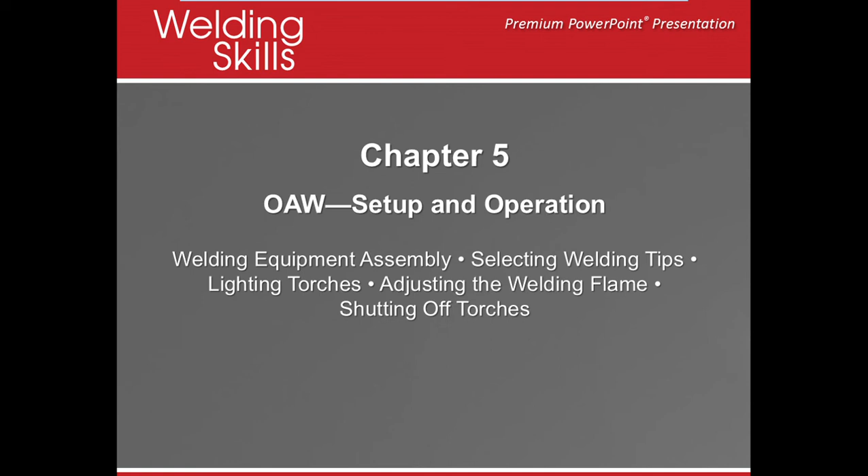Alright, so we're going to talk about putting on the regulator and the hoses. So the first thing we want to do is we want to crack the cylinder valve. We're going to open and close it really quickly. This allows us to blow out any type of debris or material that's stuck in there.

Then we're going to put our regulator on. We're going to make sure that there's nothing that's going to get in the way of us putting this on correctly. We want to make sure that we don't cross thread because we know this regulator is brass, and so are the fittings on our cylinder valve. Okay. We want to also make sure that the adjusting screw is backed all the way out before we put any type of pressure on it.

Okay. Then we're going to do the same thing with the acetylene regulator, and then we're going to purge all the hoses, okay? Then we're going to attach it, the red for our fuel, that's acetylene, and the green is our oxygen, okay? And then we're going to slowly open our valves.

When we open an oxygen valve, we're going to open it until it doesn't go anymore because it is a seating valve, which means there's two O-rings in there from the top and the bottom, and they need to seat fully for it not to leak. Now the acetylene is a little bit different. The most we want to go is 3/4 of a turn, and it will stay and not leak at whatever area that you keep it at. So we want to make sure that we can turn it off quickly.

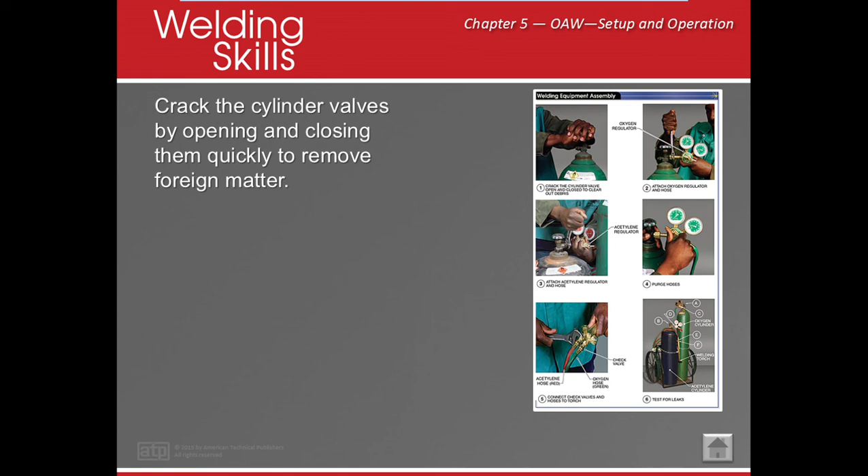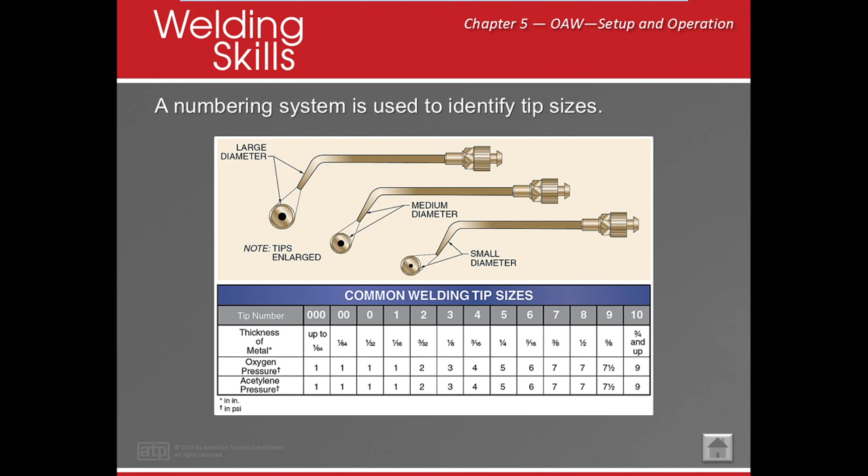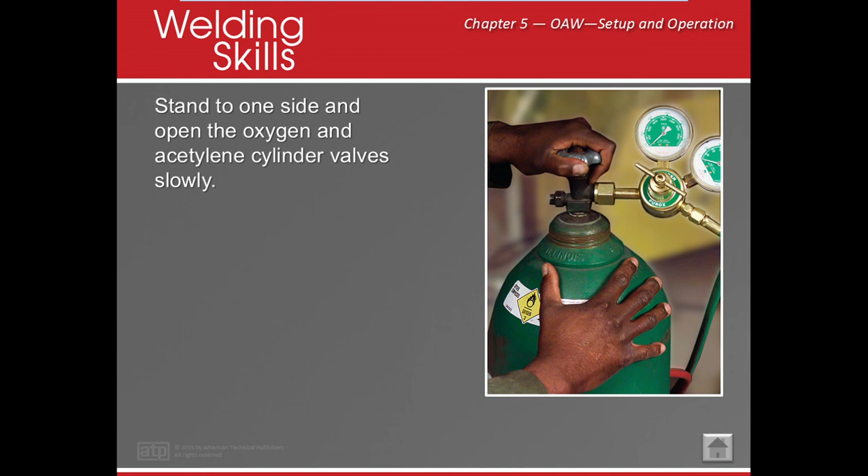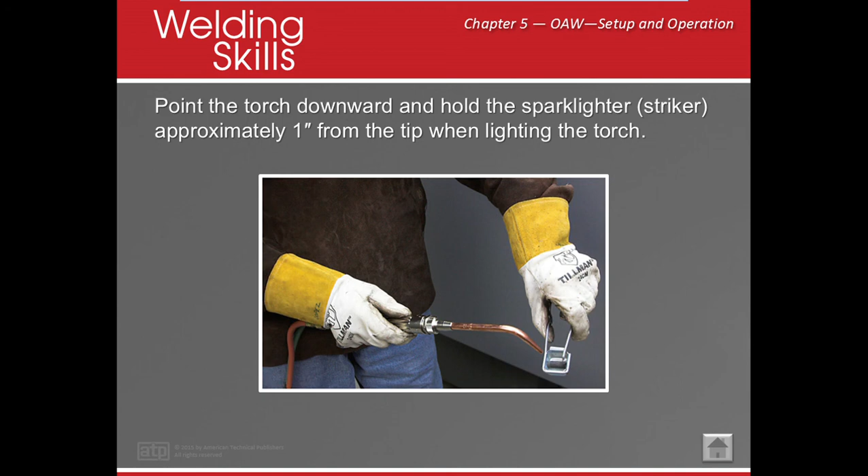All right, we always want to point the torch down and use a striker. Why wouldn't I want to use a match or a lighter? Well, of course, they can always catch yourself on fire, and that little lighter can always blow up in your hand. We always want to point it downwards so that we don't light anybody, especially ourselves, on fire.

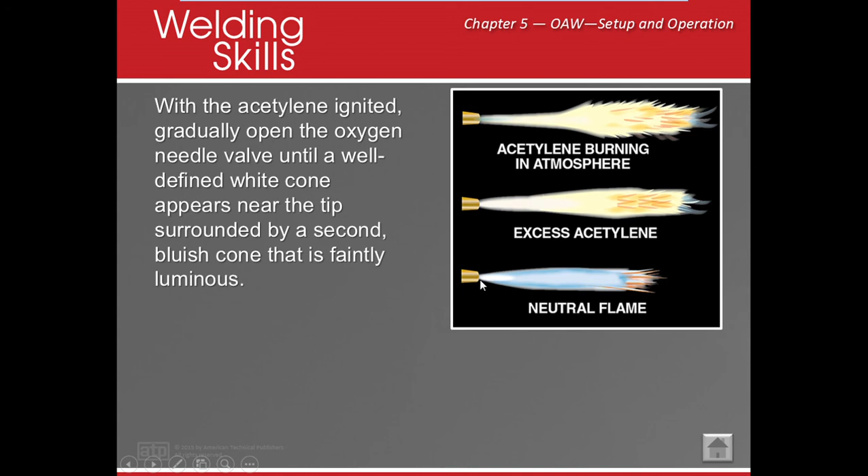Then we're going to open up the oxygen, okay? And they say that we need a well-defined white cone near the tip. So what they're saying is this area here, right here, is going to be well-defined, okay? So we're going to be able to make a neutral flame.

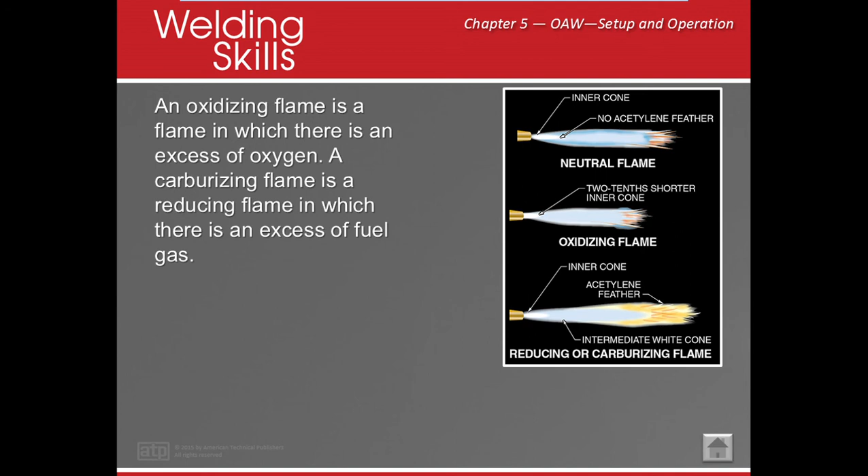A carburizing or a reducing flame means we have an excess of fuel gas. That can be acetylene, that can be MAPP gas, that can be natural gas, whatever we're using, okay? And it's going to be a lot oranger, and it's going to be a lot longer. We're really not going to be able to see too much of the cone, but it will be there.

All right, points to remember. We want to make sure we properly secure cylinders because we don't want a bomb going off or even a rocket. We want to point the valve outlet nozzle away before we crack the cylinder because we don't want any oxygen or acetylene on ourselves, which can cause fire.

We want to make sure that we test connections whenever there's a connection, whether it's at a tip or at a hose where the gas comes in or out. We want to use soapy water and check for bubbles. Okay. Now the welding tip size we know is the number is determined by the hole, but whatever hole or tip size that we use is determined by material thickness.

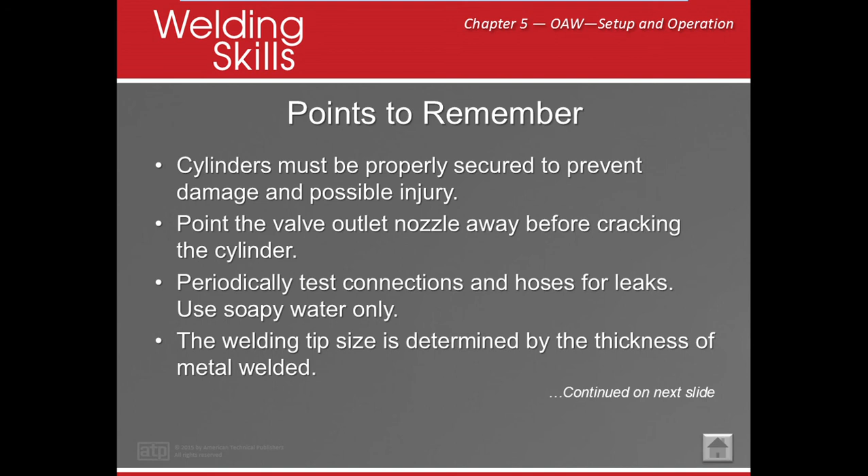So we need to remember 3 different rules. Rule number 1, match our base metal to our filler metal. Rule number 2, we want it as strong or stronger than our base material. And rule number 3 says 90% of what I do is dictated upon thickness of material. So we know that the thickness of material dictates the size of welding tip that I'm going to use.

All right, we always want to stand to one side before opening the cylinder valve because if it blows out, I do not want a face full of gauge. We want to adjust the torch to a soft, neutral flame, that's a 1-to-1 flame, unless the type of metal requires a different type of flame.

Prevent conditions that may cause a backfire or flashback. Ultimately, when we get a flashback or a backfire, it's because we have a dirty nozzle or we're depriving it of fuel, oxygen, or combustion. Okay? We want to make the passage in the welding tip clean, so we always need to make sure that we clean it. And when we clean it, we want to make sure that we leave the oxygen on so that it can blow out any soot.

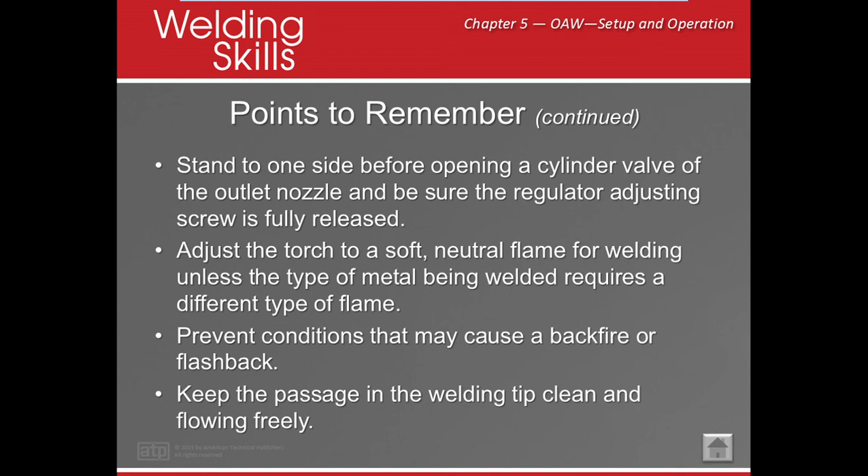All right, why should cylinders be secured before being used? Well, we want to make sure that they don't get damaged and fall over and somebody can possibly get hurt. Why should the cylinder outlet nozzles be examined closely? Well, we want to make sure that there's not a damaged screw thread or anything like that. And if we have a poor connection, we're also going to lose gas, which means we're losing money.

What is the proper order for setting up the welding equipment? All right, guys, here it is. Number 1, crack the cylinder valve by opening and closing them quickly to remove foreign matter. Number 2, connect oxygen regulator and hoses. Number 3, connect the acetylene regulator and hoses. 4, purge hoses. 5, connect check valves and hoses to torch. 6, test for leaks. All right.

Why are check valves used? Well, check valves only allow the flow of gas in one direction, which means that flow of gas, if it ever combusts, doesn't go back into our hoses and doesn't go back into our cylinders, which can cause explosions. What is the proper method of testing for gas leaks?

All right, guys, what do we do? Light a match. No, just kidding. Here's one way they say to test for leaks: open the oxygen and acetylene cylinder valves. And with the needle valves on the torch closed, adjust the regulators to approximate working pressure.

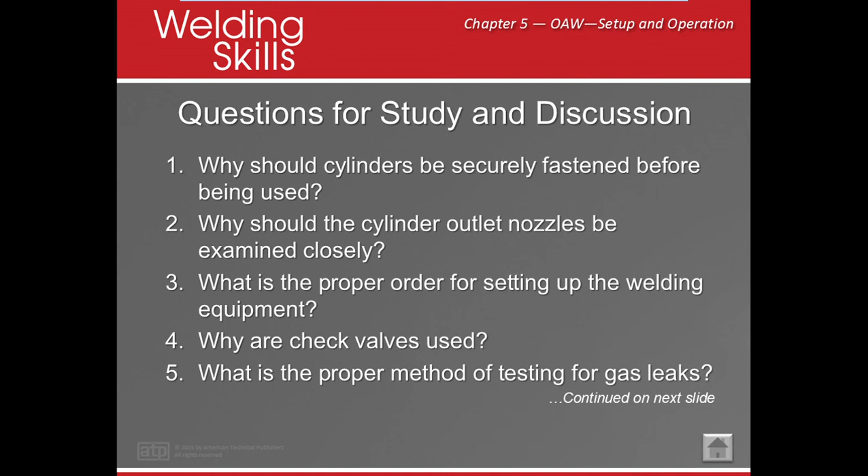All right, what governs the size of the welding tip that should be used? Drum roll, guys. What? Thickness of material. Describe the process for lighting and adjusting the flame for a torch. It's not going to be for a cutting torch, it's going to be for a welding torch. There's a typo on here.

All right, number 1. Select the correct welding tip size for the metal to be welded and connect it to the torch, which means making sure the thickness of our material is comparable to the tip size that we're using. Stand to one side and open the oxygen and acetylene cylinder valve slowly. Set the working pressure of oxygen and acetylene regulators, adjusting valves to correspond to the required working pressure of the welding tip. Turn the acetylene needle valve on the torch approximately 1/2 turn.

With the spark lighter in the hand held about 1 inch away from the end of the welding tip, ignite the acetylene as it leaves the tip. Adjust the acetylene until the smoke disappears. The acetylene needle valve on the torch should be turned approximately 1/2 turn. Well, that was about it. Okay. All right. How far should the acetylene needle valve be opened when lighting the torch? About a 1/2 turn. All right.

What is an oxidizing flame? An oxidizing flame has an excess of oxygen. What is a carburizing flame? Well, it's also called a reducing flame, and there's an excess of fuel gas. What's the difference between a neutral flame and a carburizing flame? A neutral flame has neither oxidizing nor carburizing characteristics. The brilliant white cone should be approximately 1/16 to 3/4 inch, depending on the welding tip size.

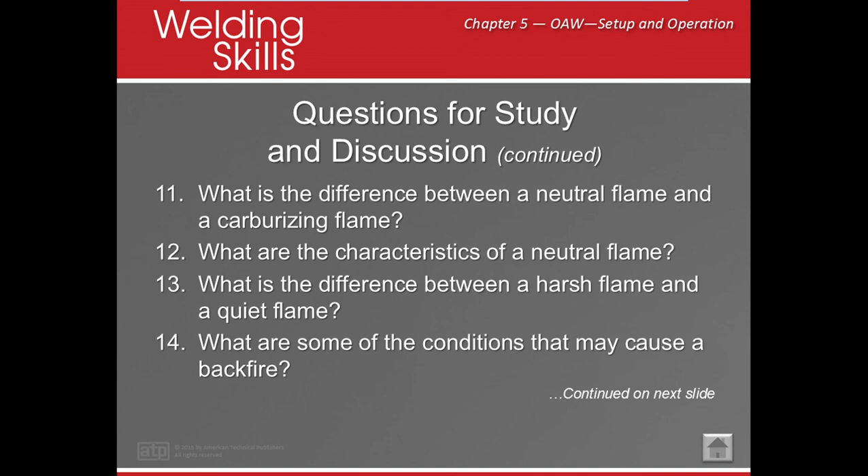What causes a backfire? A backfire can be caused by operating the torch at a lower pressure than required for the tip, touching the welding tip against the work, overheating the tip, or an obstruction in the welding tip. All of those things can cause problems.

All right, what is meant by flashback when we're using an oxyacetylene torch? A flashback is the recession or the movement of it into the mixing chamber of the torch itself. And you'll hear, okay? A flashback flashes quickly into the torch and it burns inside. It gives that hissing and squealing sound, and it's because a welding tip can be clogged, the needle valves are not right, or the pressures are incorrect.

Okay. Why are hoses purged after being connected to the regulators? Well, we want to make sure that if there's any dirt or anything lodged in there, it comes out before we attach them to the torch. Okay. Why should the welder stand to one side when opening cylinder valves? Well, we don't want to face the gauge. And if we're cracking our valves, we also want to make sure that we don't get it on our clothing, because it gets into the little particles of our clothing, and those little pieces and porous areas, if they're subjected to any type of spark, well, kaboom.

All right. Remember this, guys. What is the last step done to the regulator when shutting off the torch? The last step is to release the adjusting screws on the pressure regulator. That means I've closed everything else off, I've bled off all of my stuff, and now I'm taking these pressure screws where I set up my pressure and I'm backing them off. It's really important.

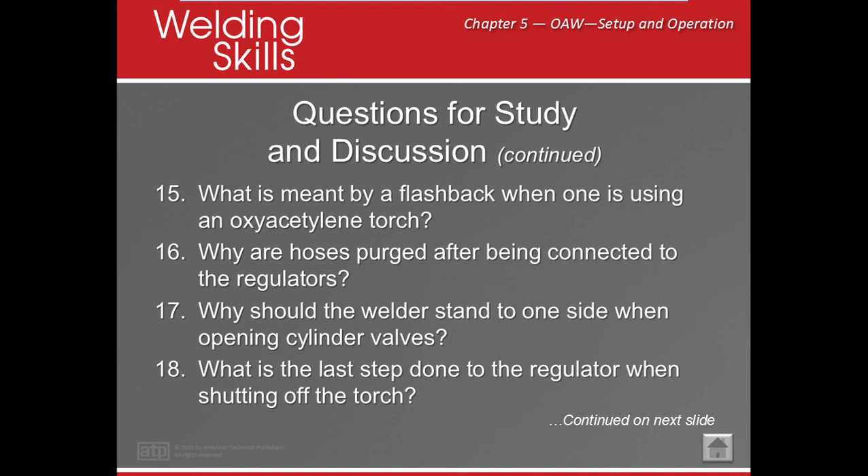All right, I think this might be it. I'm not sure. There we go, one more. Oh, sorry guys. One more. Last one.

All right, what kind of mixture of oxygen and acetylene is required to achieve a neutral flame? That would be a 1-to-1 mixture. What happens when an oxidizing flame is used to melt the metal? Well, it'll give off a lot of sparks, and sometimes it makes like a white foam on the surface, and then when the piece cools, the metal will be really super shiny.